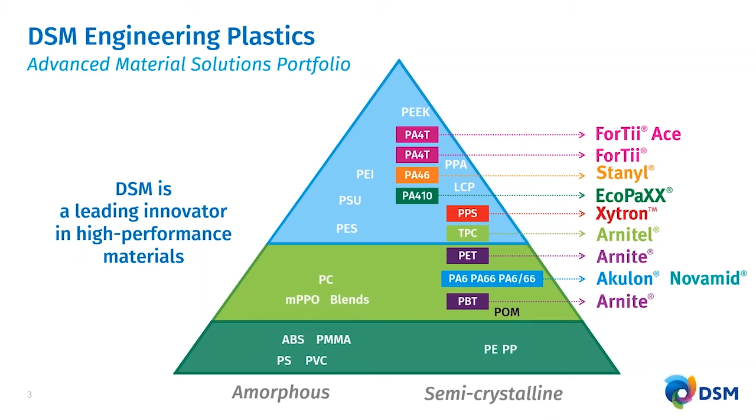So with this broad, high quality materials portfolio and in-depth technology know-how, we work in close collaboration with customers across the globe to develop new applications. And you'll find our products in a wide range of applications. As a global supplier of high performance plastics, DSM has built global leadership positions in a wide variety of industries by designing and developing better, smarter, stronger, safer, smaller, lighter, longer lasting, or more sustainable solutions. Our dedicated teams of industry experts, scientists, and engineers can and do work closely together with our customers and find ways to realize successes across the globe.

So CAE enables this modeling of these new components, reducing the risk in designing and manufacturing parts made from thermoplastics. This then increases confidence in your design, ensuring no compromises when it comes to safety, quality, cost, and time to market. Additionally, we just cannot keep up with the rapidly accelerating pace of the market without simulation and virtual prototyping tools.

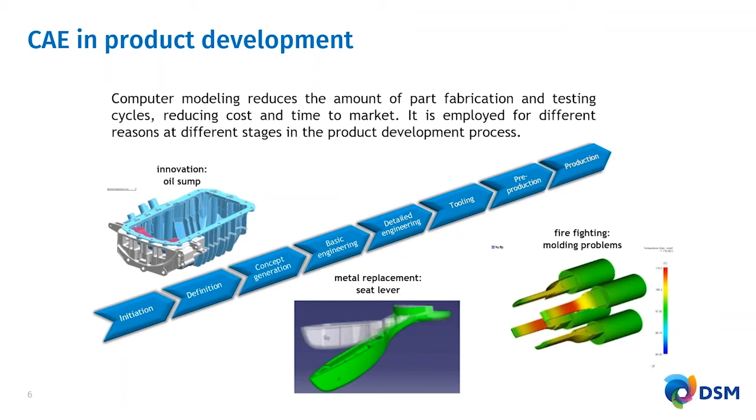What do we need to support this? We need a global CAE team to support global customers. We need the necessary software tools and know-how. We must also proactively and aggressively, I would say, develop material data needed for simulations. We must also establish and develop connections to our customers and others, and also continuously develop and improve our methods.

So why do we develop methods? Well, one, to improve accuracy for making our designs more efficient and for lowering the safety factors. And also for creating a better understanding and to stay an expert, to be ready. This is needed for us to be able to quickly support customers with more difficult projects and operate at a high level with, I would say, the same level of understanding as academia and our software developers.

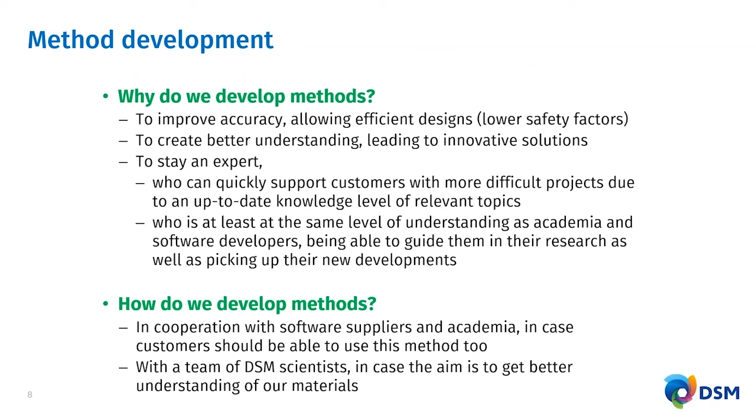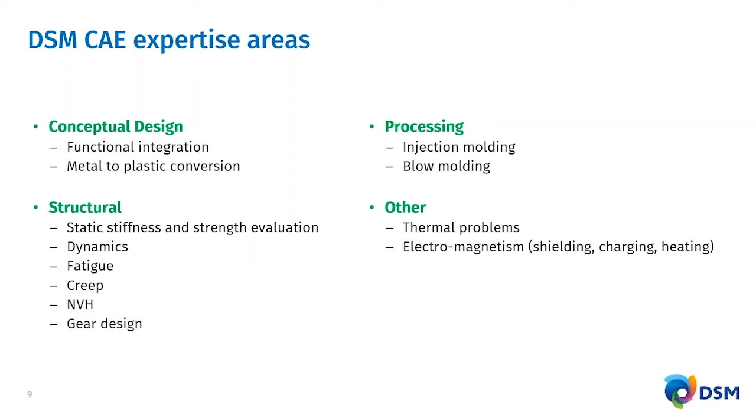If you look at our expertise areas, we have these broken out with conceptual design, and that includes the functional integration, how we attach plastics to metal, for example, also metal to plastic conversions. And then we have a whole host of expertise within the structural realm, including static stiffness and strength, dynamics, fatigue, creep, NVH, including natural modal frequencies, force frequency, vibrations, gear design, and also on the manufacturing side, including injection molding simulation, blow molding simulation, and other areas, including thermal type problems and EMI.

How can we support you? With our team, we can support you with conceptual design, again, and metal plastic conversions. We can be a partner. We can be a kind of a discussion partner for your CAE department, which helps boost the confidence in DSM products and helps DSM actually better help you.

Also sharing advanced modeling know-how, and also delivering reliable material data sets for the simulation. CAE data is not so ordinary and readily available. Having these connections is therefore important. And all of this equates to helping you get the maximum performance out of the DSM materials.

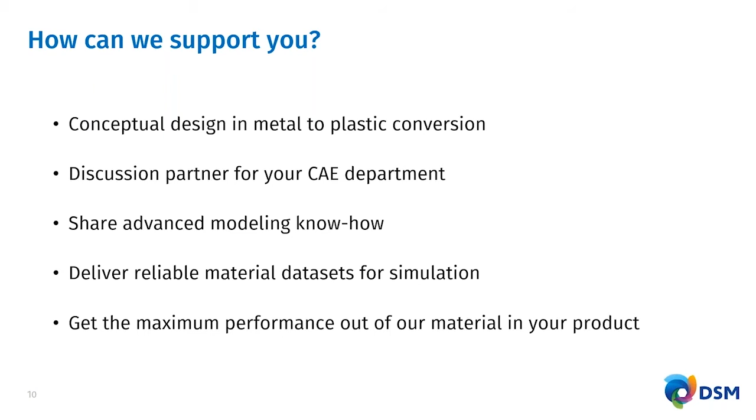Okay, next I'd like to walk through our showcase, our metal replacement of our demo EPS housing application. This includes what was involved with design engineering, as well as analysis, both structural and flow analysis work, and what we do to advise customers on injection molding, tool design, process optimization. So this is both, in a way, a capabilities presentation, but also an overview of how we approach doing demonstrations of parts.

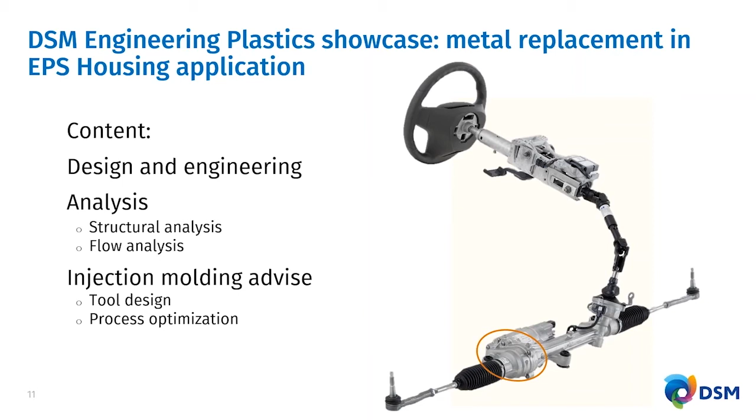So there, with the EPS housing, there was an existing metal housing. These were typically aluminum. They're cast machined. And the drivers for replacement were the cleaner production, the advantages in production, no machining, and generally increased mold life with injection molds versus cast molds, and weight reduction to reduce cost.

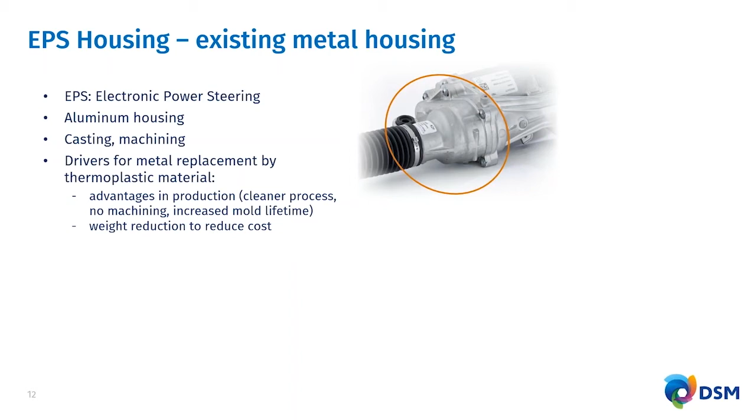If you look at some of the challenges for these housings for electronic power steering, operating temperatures range from -40 to 125°C. You have some aggressive loading requirements for the bolt tension and the rack and the torque. There's also a variety of chemical resistance requirements typical for automotive. Dimensional requirements were very tight. You need to have very accurate dimensions on your holes and mounting locations. And the fixation of the other parts, the assembly requirements, is also a challenge.

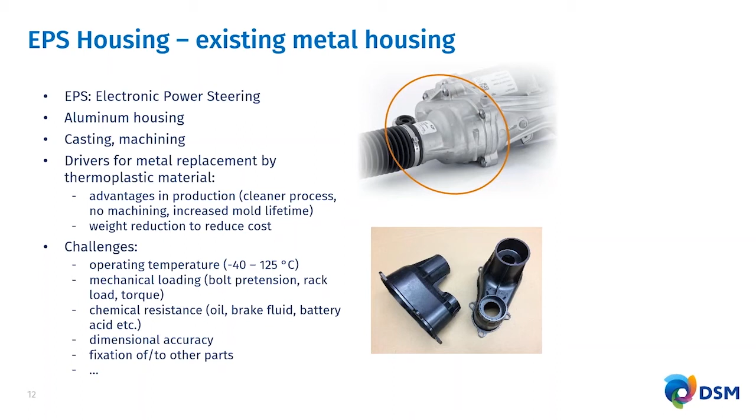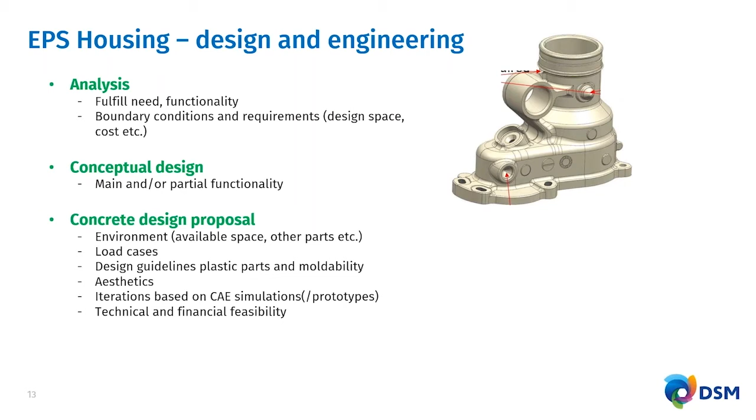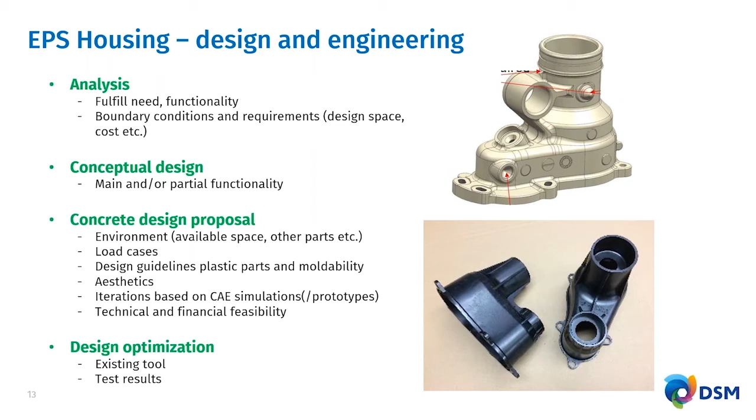And this all feeds into a concrete design proposal that meets the needs of environment, the requirements of the load cases, moldability, manufacturability, the aesthetics, and iterations might be required, but this leads to reduced prototypes or even potentially elimination of prototypes. And design optimization.

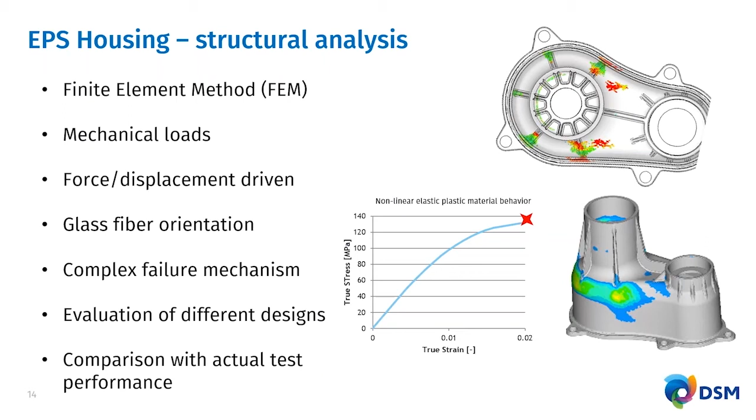So for structural analysis, we approach this with the finite element method, or finite element analysis. We're evaluating mechanical loads, the force displacements. We're attempting to gain an understanding of the fiber orientation, capture the fiber orientations needed for the structural analysis. Understand the complexity of the failure mechanisms. And in this process, we're evaluating different designs, and we're comparing our simulations with the actual performance of the molded part.

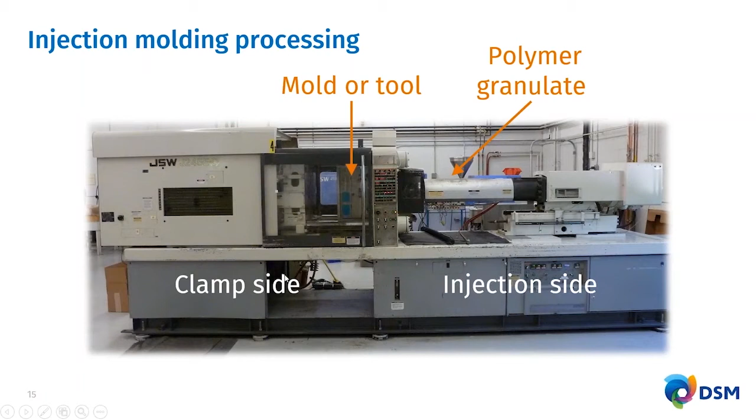A little background. These are injection molded parts. If you've never seen one, this is what an injection molding machine looks like. It's a very basic description of a machine. You have the injection side, where the polymer granulate is entered into the hopper and feeds through a screw and barrel and processes the melt, injects the melt into the mold under high pressure, and the mold remains closed during that process on the clamp side of the press.

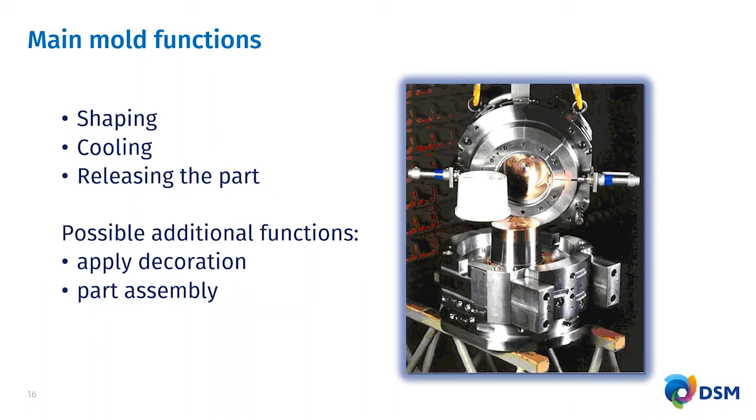the case generally speaking. In today's reality, the mold maker is first of all interested in the shape and dimensions of the cavity. Next, he will place his ejection system. At last, he looks at the cooling and puts in the cooling lines in the space that is left. This way of constructing a mold can and often leads to a less optimal mold design. The thinking here is the cooling system should get more or special attention, especially for the higher end technical parts.

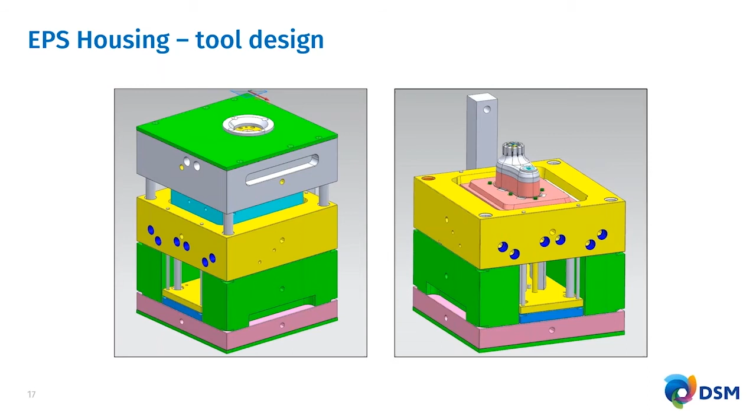This is what this particular mold looks like for the EPS housing. And on the left, you got the full assembly. You got the A side. This is the side where the melt enters, and the B half, or the moving half of the mold, is the core side of the mold. If exposed, this is what it looks like. You have kind of a reverse of the inside of the EPS housing. So this is a CAD illustration of this mold.

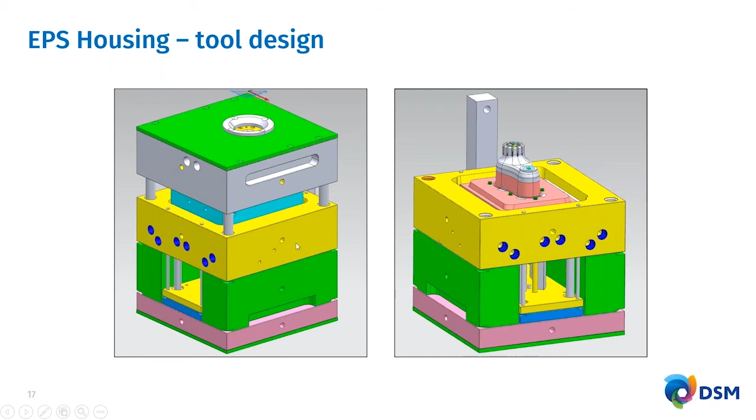So here we have both the image of the mold, the actual mold that was cut. Below is the illustration, the CAD illustration of how this is done with conformal cooling. We have some very thin steel that needs to be cooled and is not able to be cut with traditional means or traditional type of gun drill holes for cooling.

The above printed portion of the steel core incorporating the conformal cooling of the cooling circuit is an additive process. The process starts with the placement of the completed CNC core, which is shown here, into the additive manufacturing or the 3D printer for creating the printed portion. And then the two are essentially fused together during that process.

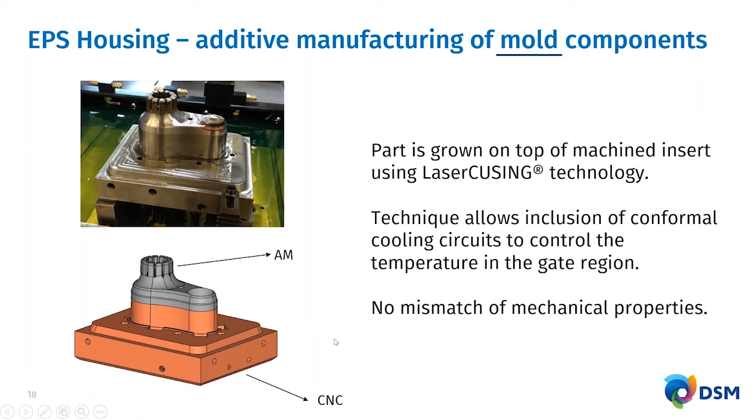So here's a better illustration of the core with the cooling circuits, the blue color representing the actual cooling circuit, and the pinkish orange or beige color representing the steel. On the left, you have, again, the CNC portion of that core block. Here you have the additive manufacturing or the printed portion of this. And again, this printed portion is the key. It's the magic. It's what allows for the conformal type of cooling channels, these nonlinear channels, to be formed.

And here's sort of a close-up of this. So this is something, again, you wouldn't have been able to do otherwise. It has to be printed, and we're able to get sufficient cooling through these thin cores, making nice dimensionally correct parts. So this is the bulk of the conformal cooling circuit, which begins at this intersection, I believe. Everything else is done with traditional channels. And then these loops that are shown above this surface are also the conformal part of the circuit. Below it, it intersects with the traditional machine gun drilled circuits. So, okay, enough on that.

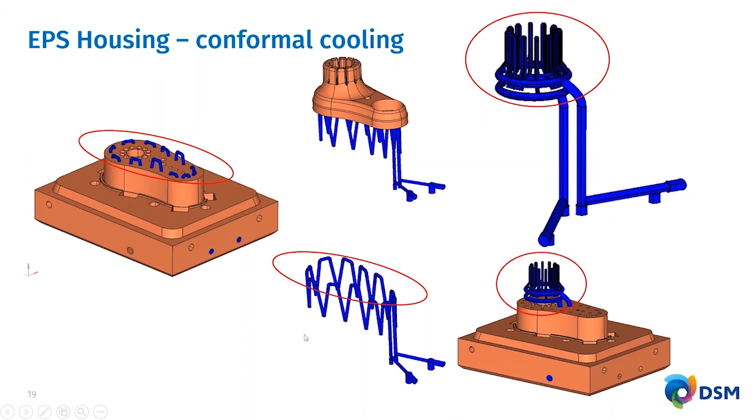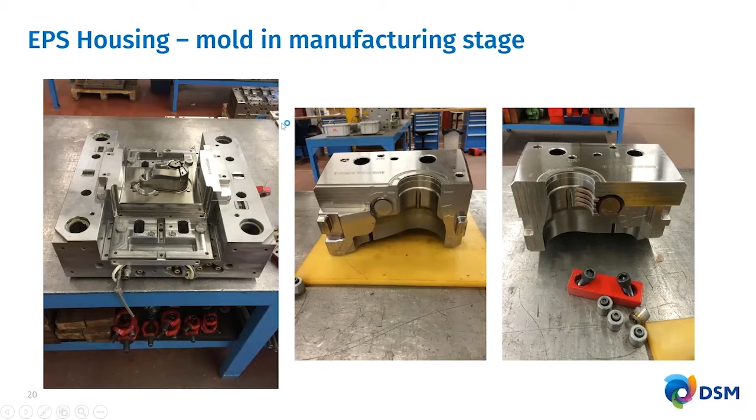And then, all right, so here's what the mold looked like during the assembly, showing the side cores that form the sides of the part. It's a fairly complex mold. There's a lot that goes into one of these molds, albeit a demo or demonstration type of mold. There's quite a bit of effort involved with this.

All right, so when we assist customers when advising on tooling, advice might include how to position the part in the tool, where the parting line should be, how to gate the part, where the melt entrance position should be located, layout of cooling systems, layout of ejection systems, and also specific types of steel that work best with our particular materials. And lastly, molding simulation is also intensively utilized, including Moldflow and Moldex3D within DSM.

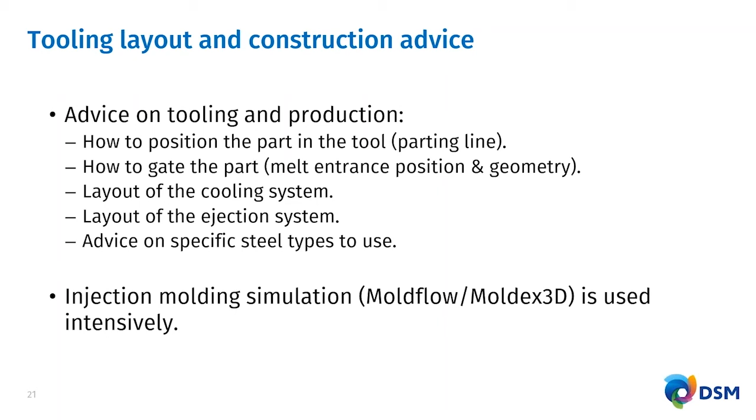So what does a mold filling simulation look like? This is broken out into several phases. The mold filling portion, which could include the packing phase as well. On the left is the filling animation, blue representing the beginning of the fill, and red is the end of fill locations. So from this part of the analysis, we can learn lots of things. It could be used for the gating, optimizing the tool, the runner systems. And it also could be good feedback to your designer to improve the design to make it more manufacturable.

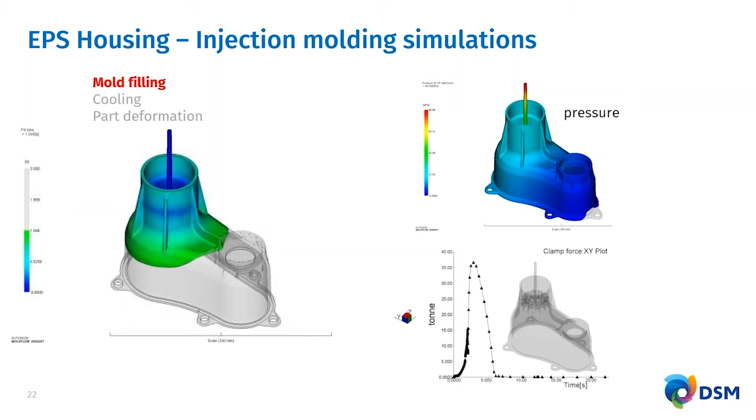You would, at this part of the analysis, look at your injection pressures, make sure that it's reasonable. Is it manufacturable? And is it going to require a clamp tonnage that's reasonable? Is it going to work with the machine that you have targeted?

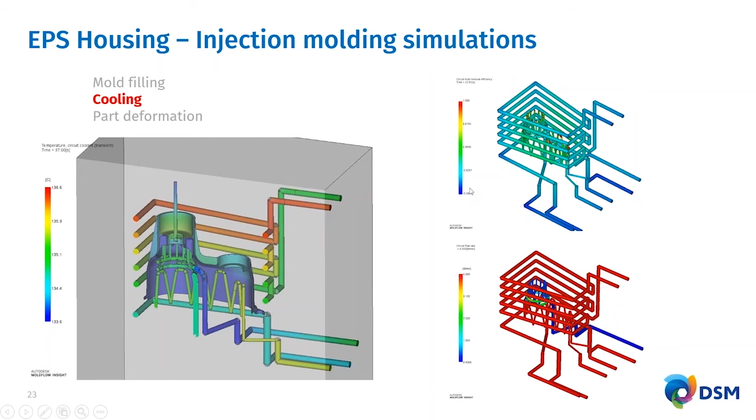The next part of simulation might include the cooling channels. This is where it gets real, or can get very complex. As you can see, there's a lot of modeling, a lot of consideration. This is for this EPS housing. All of this was included: the traditional cooling lines as well as the conformal circuits. And then the final part of the simulation is the predictions of part deformations, the warpage of the part.

Okay, so with an integrative simulation approach, the effect of processing is and can be included in determining the application performance. Basically, the orientations of the glass fibers, or could be carbon fibers or fibers of any type, are determined during the injection molding phase, which then ultimately determines the local mechanical properties, stiffness and strength.

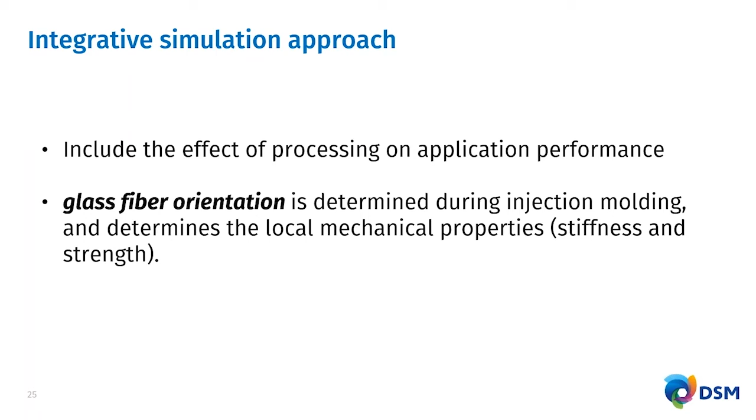So as designers and engineers replace metal parts with parts made from lightweight thermoplastics, being able to accurately model the part's performance is critical. The properties of injection molded short glass fiber reinforced plastics can vary depending on temperature, strain rate, and the orientation of the fibers. Computer-aided engineering tools enable this modeling of these new components, to reduce the risk of designing and manufacturing parts made from thermoplastics, increasing confidence in the new design and ensuring no compromises when it comes to safety, quality, costs, and time to market.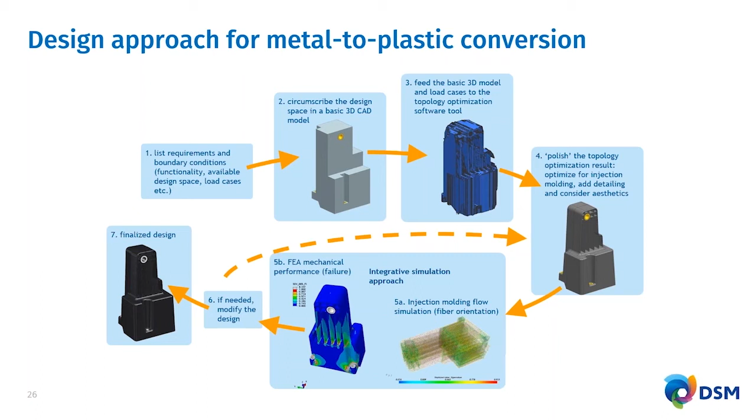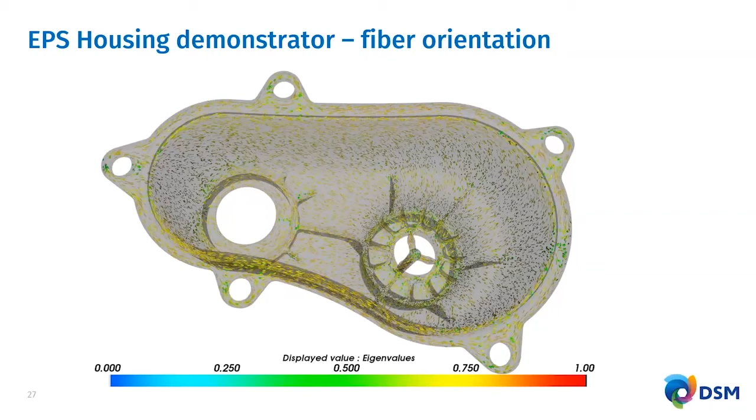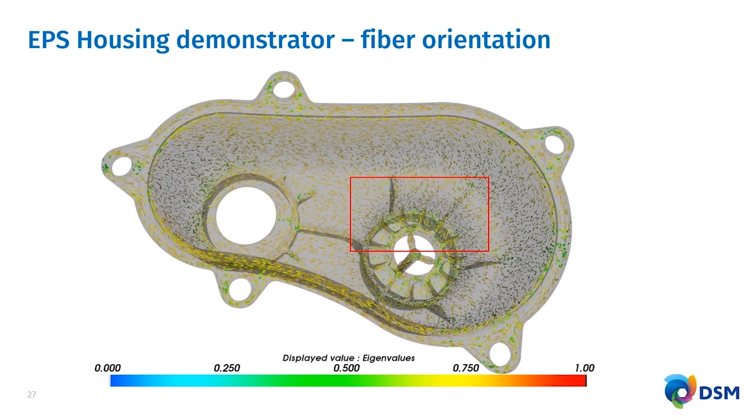All right, so fiber orientation. This is an output, a result of fiber orientation from the flow analysis software. This could be, again, Moldflow or Moldex3D, and there's certainly others capable of this. And this is what it looks like. If we zoom in, you can then see the orientations represented in ellipsoids. So very thin or skinny ellipsoids represent a higher degree of orientation. The more rounded ellipsoids are much less orientation. Then it also provides you a vector with a direction of where the fibers are going or being oriented.

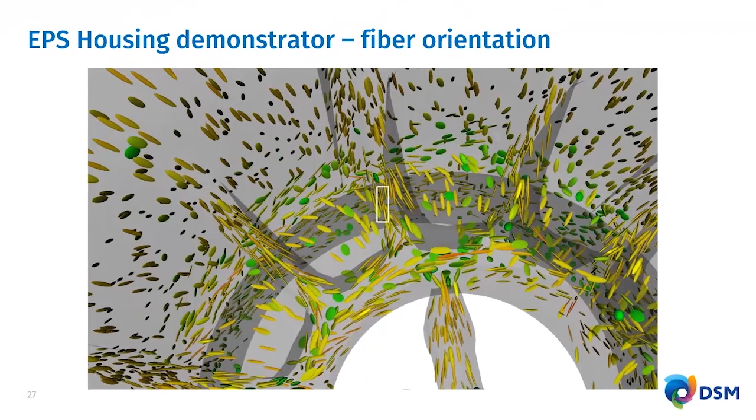So if we zoom in further, where there's a higher degree of orientation, we can then capture the properties using tools like Digimat to determine the flow direction as well as the cross flow direction, first principal and second principal directions. In comparison, there's an area or an ellipsoid with much less orientation. This is what the two stress strain curves might look like. They're fairly close to one another.

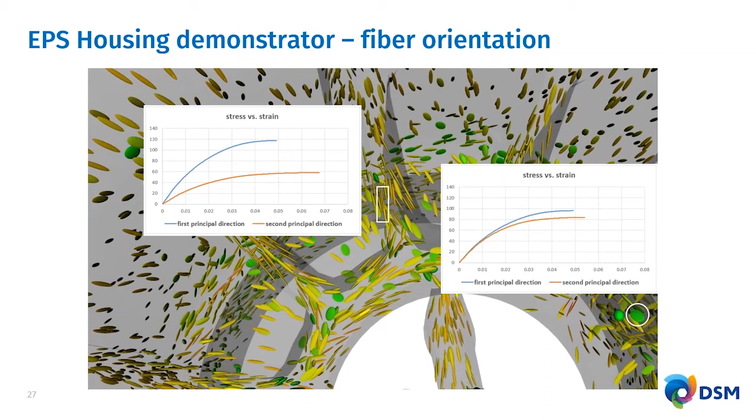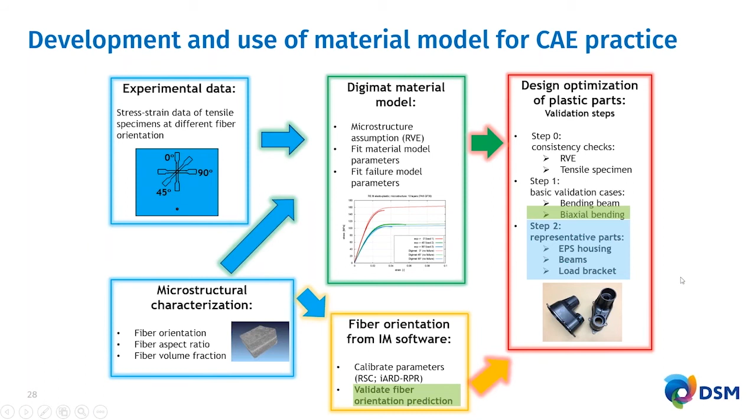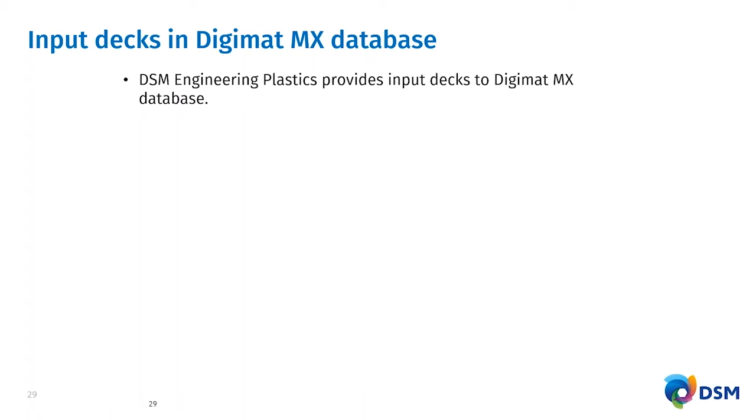So far we've applied this in 3 of our demo modes: the EPS housing, some beams, and a load bracket. When we develop the data, we also work with our vendor, e-Xstream Digimat, to provide them our data to be input into their database. This is called the MX database, typically for short glass fiber reinforced compounds, as you see here. Currently, we have over 100 input decks available and ready to run. I should emphasize fiber orientation prediction is also essential for correct warpage predictions. It's not just for structural considerations.

Okay, so since DSM approaches all of our material sales as a partnership, we have measured the stress strain behavior of our materials to derive thorough input decks for the Digimat software. This enables us to work even more closely with our customers and to identify future needs for material models, such as the effects of temperature, humidity, and crash behavior. Our teams check the accuracy and robustness of our material models by using in-house testing on injection molded parts to validate that our material models provide accurate predictions. Through this rigorous testing, we have successfully verified excellent results for stiffness, eigenfrequencies, and load at failure. We've also developed new models to get good results for the fatigue performance of our materials.

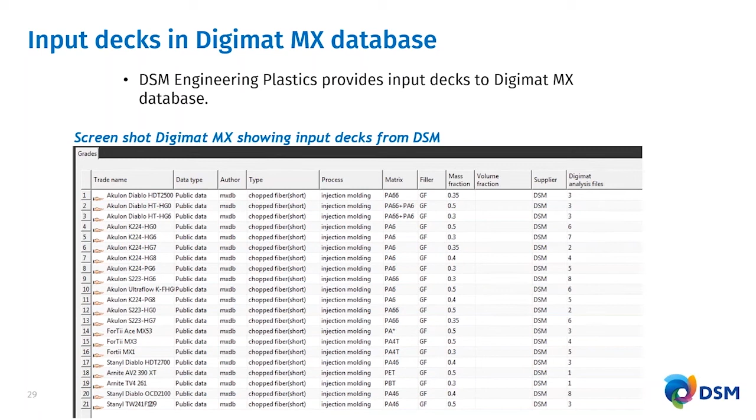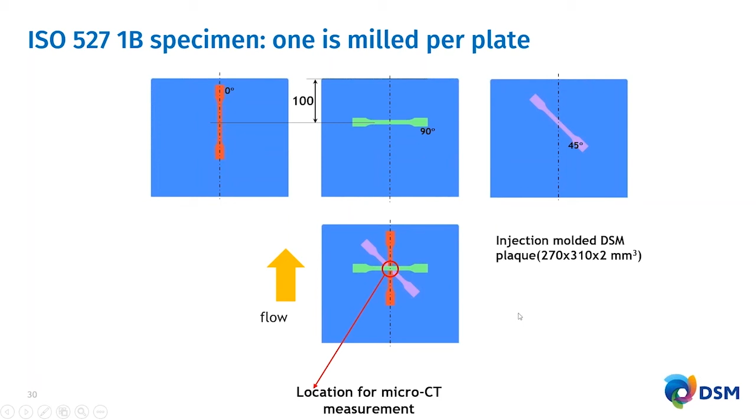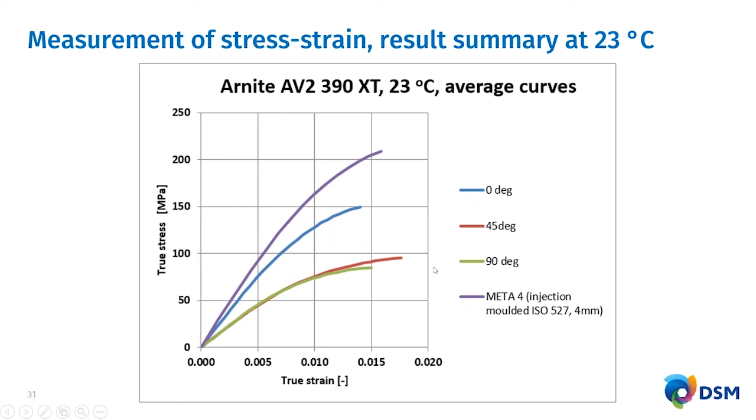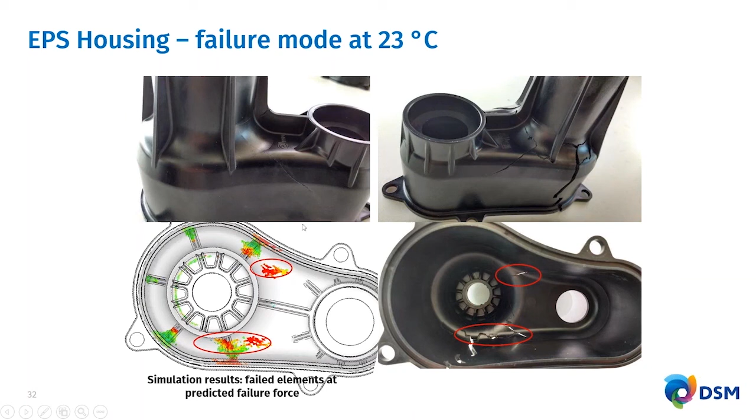And let's see, if you compare that with the simulation utilizing the integrative approach, you can see there's a fair amount of agreement with the prediction. You compare this location with here, and these with this location looks fairly comparable.

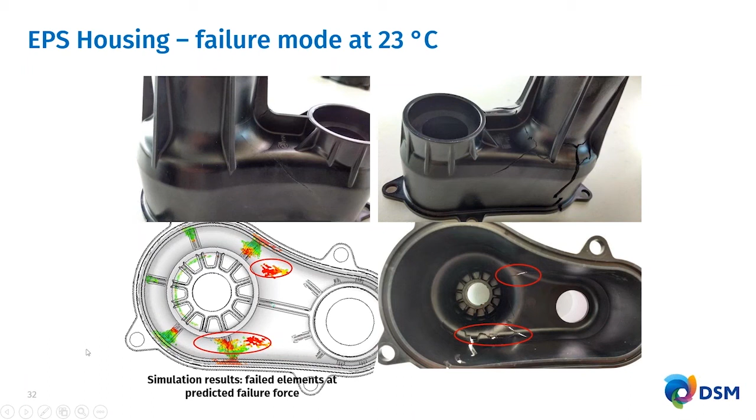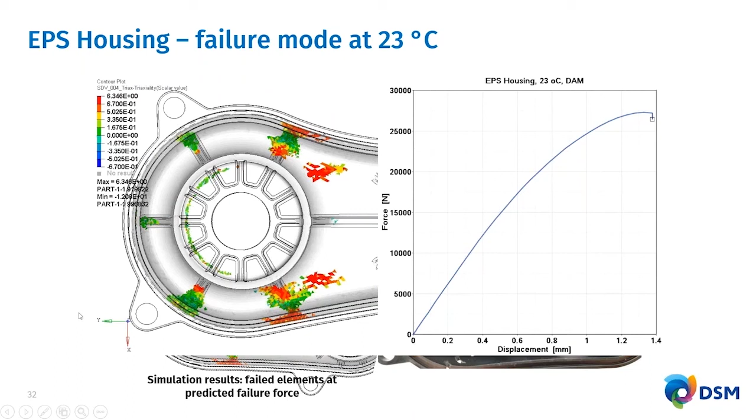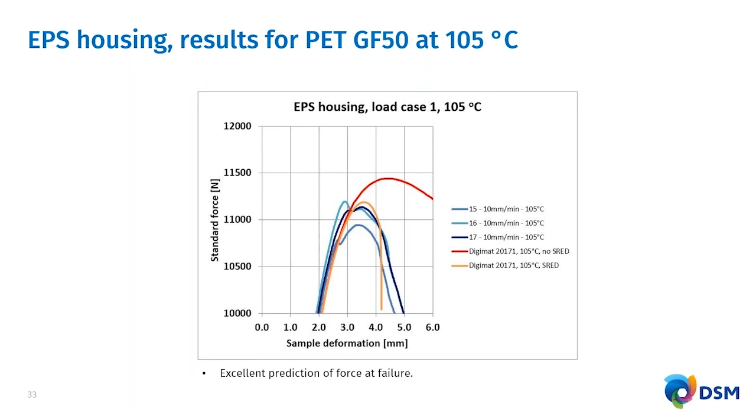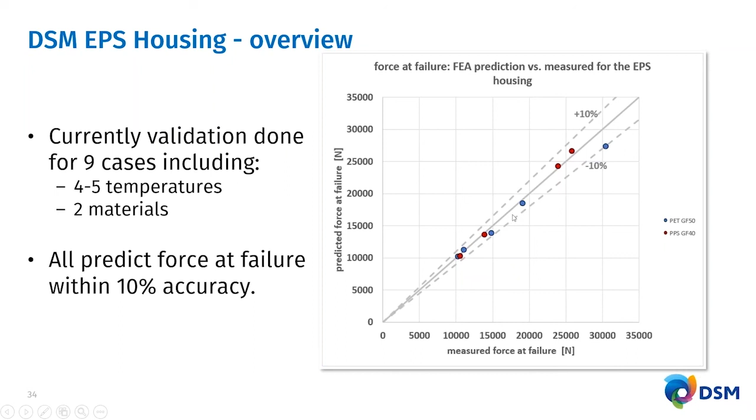And these are basically 9 different cases, including 4 to 5 temperatures. And they all fall within basically this window of meeting our goal for 10% accuracy. So that's good.

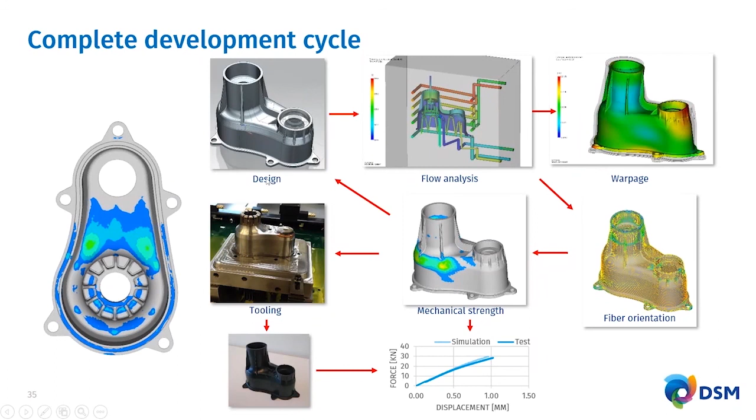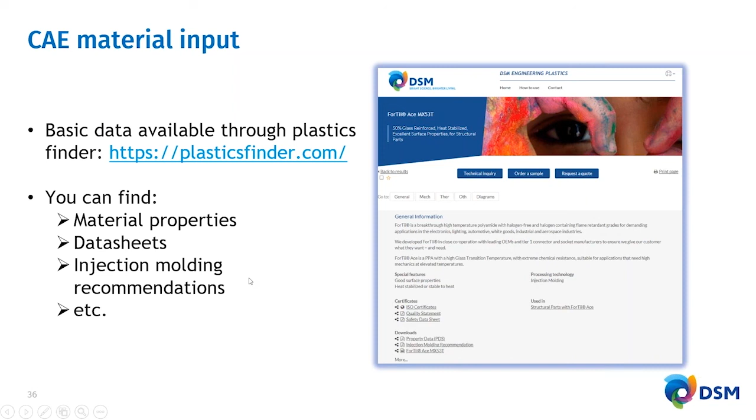As for Moldflow data and Moldex3D data, they also have databases, and we have, I think, something like over 250 grades fully characterized for those simulations as well. And if it's something relatively new, then you can again contact DSM. All right.